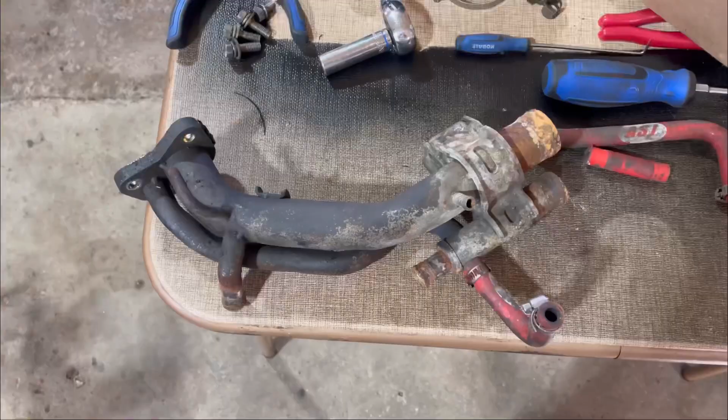Hey y'all, welcome to part 3 of the engine rebuild. In this video we're going to be focusing a lot on painting parts that are removed from around the engine, as well as cleaning a lot of the parts. Before we get into the video though, I want to show you something that I forgot to show you in the last video.

So this is your water pipe. This comes off of your thermostat housing here, and then this feeds into your block, and that feeds into your temperature sensor, and so on. This is why my coolant was so brown.

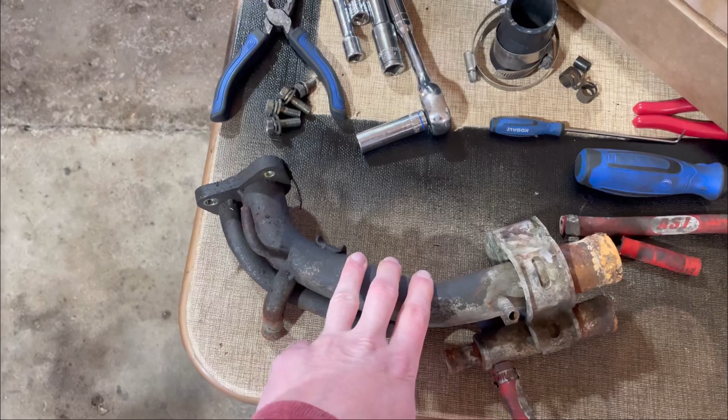It was just sending all of this rust throughout the entire system. So I went ahead and picked up a water pipe from an Avenir, which has the DET. I think it was the W11, could have been the W10, I can't remember, but it was brand new, so hopefully that solves my issue. It's a slightly different design. Some of these are in different places. Some of them, this is longer, it goes all the way down to here. This one's longer, it reaches out to here. But hopefully the replacement works just fine and I can make it work on my car.

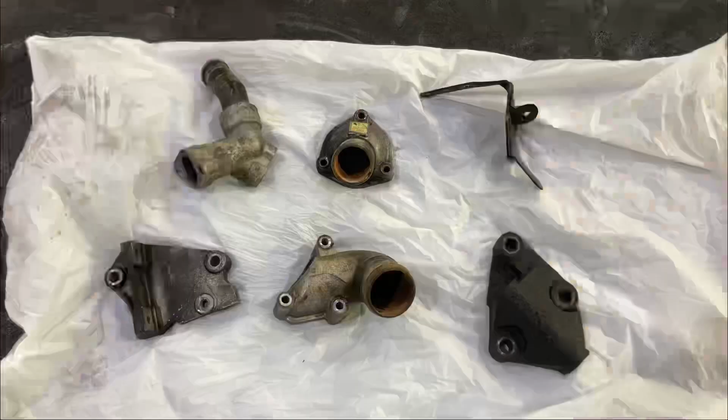So here I am at work. I have a whole bunch of different mounts and housings here that I'm going to be glass bead blasting, and then we'll paint them so it gives the block a nice refinished look. But before we go straight to glass bead, we need to put these through the parts cleaner to get off all the oil and grease.

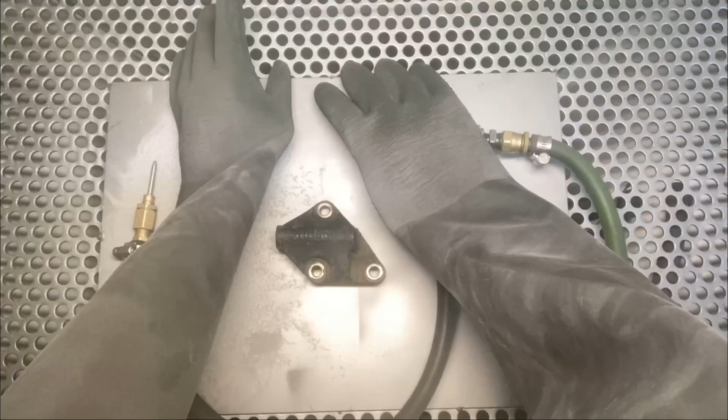Here I am in the process of alodining all these parts, so you can see the difference between the parts that were freshly glass bead blasted and the parts that were freshly alodined.

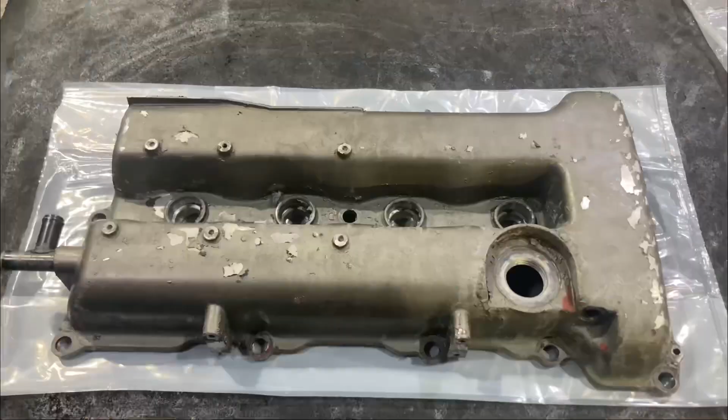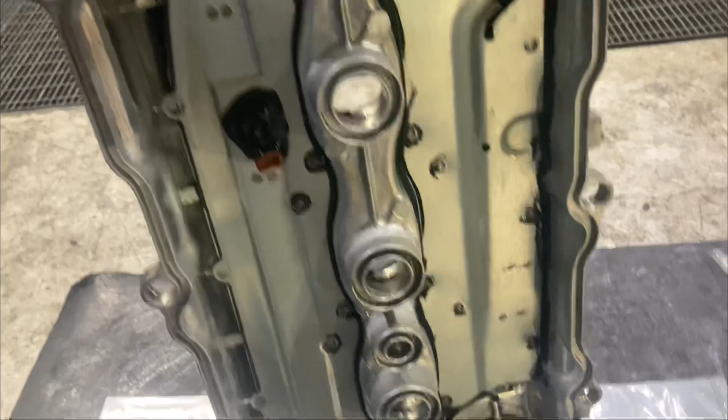I am prepping the valve cover to get painted. Disregard how crappy it looks right now. I just put it through our parts cleaner and it kind of stripped off the paint, but that's fine because we're painting it. And it looks pretty clean on the inside as well. So let's go ahead and blast the rest of this paint off.

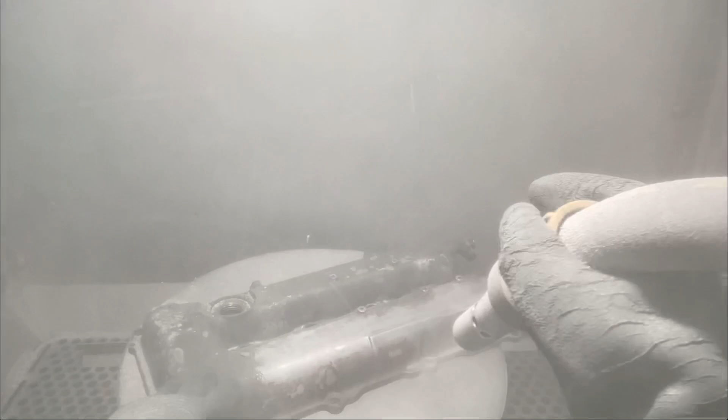Now that we have our valve cover blasted, what I'm going to do is alodine it.

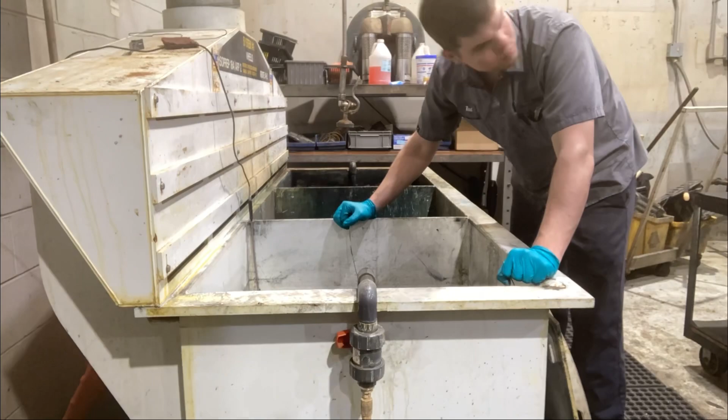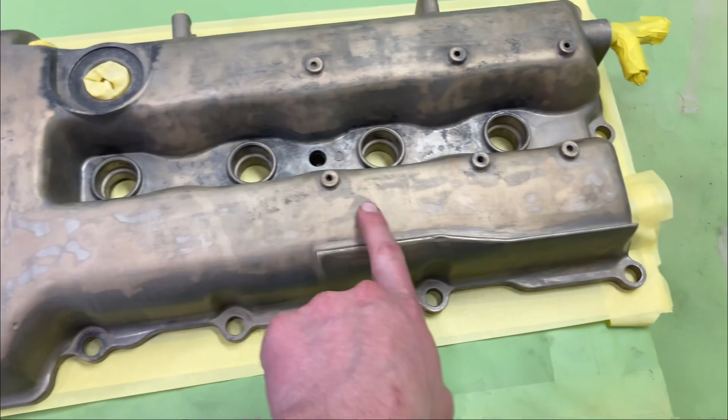Here is the finished valve cover, which is alodined and prepped for paint. Valve cover is all prepped. One thing is you want to wipe off the surface with some isopropyl alcohol, and I completely taped off the entire bottom side. Another thing is to fill the threaded holes.

When painting, make sure you wear the proper protective equipment, so a respirator or a supplied air hood, as well as gloves. Gloves aren't really necessary, but I prefer them just so paint doesn't get all over my hand. So let's get into it.

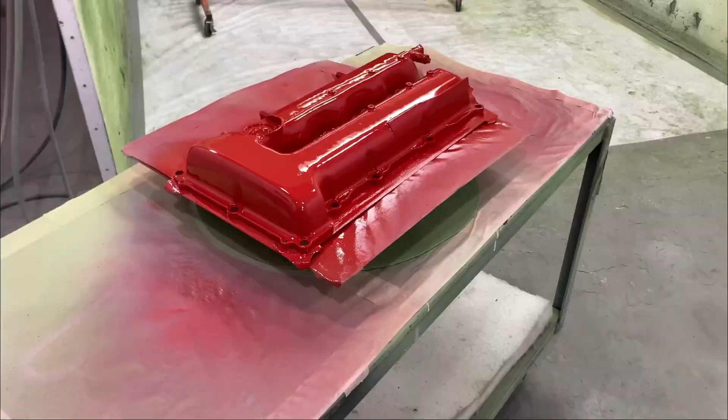Alright, so here we have all of our finished parts. You got several ones over there that are still curing, and all the black ones over here. Overall, I'm pretty damn happy with how this turned out. Look at that finish.

Alright, so we got a lot accomplished today. I've been here at work on a Saturday spraying for the last like 8 hours. Gonna be coming back in tomorrow to take all of the parts and let them cure overnight. That way I can put them back in the milk crate that I brought them in so I can take them back home.

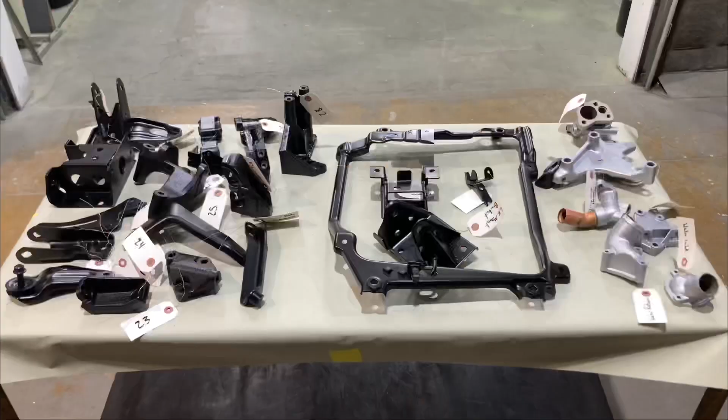And probably do the intake next because it'll look weird having all of those parts done, but having the intake not done. So that's my plan, is to grab and disassemble the intake, do the runners, the throttle bodies, the collector, and paint that silver. All of the parts here are done, so let's go ahead and pack these up, take them home, and then get the intake ready for painting.

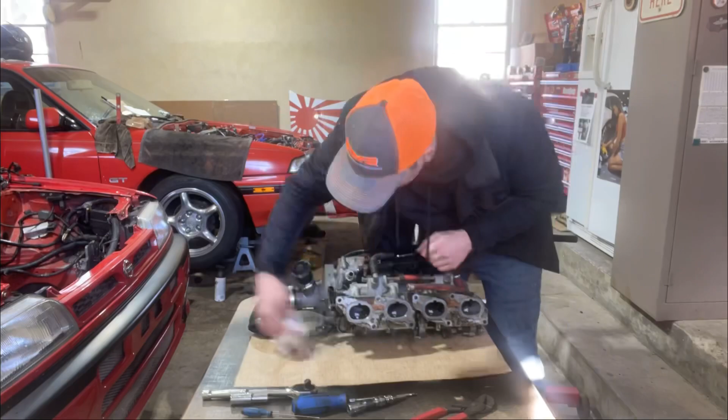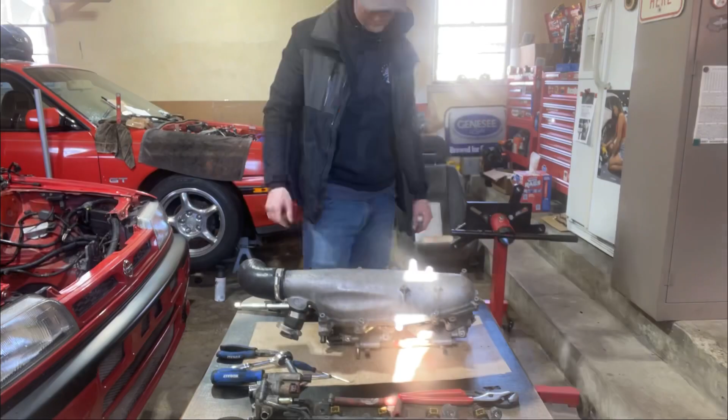Intake is all prepped, so we're gonna go ahead and paint it.

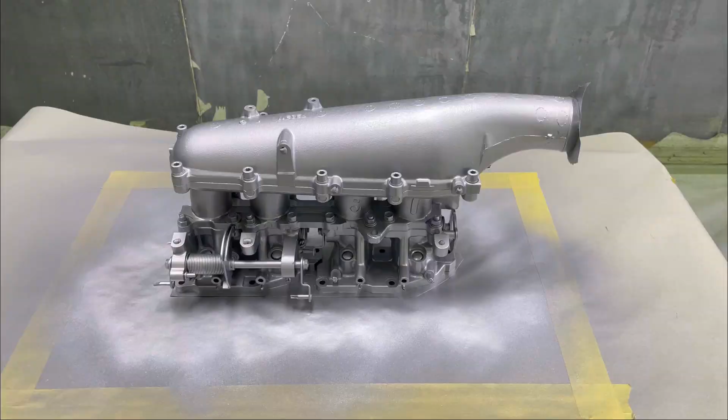The intake is finished, so I'm going to go ahead and put this underneath the heat lamp. That way it can cure and I can take it home tonight.

So while I'm waiting for this to cure, I'll go ahead and give you guys some tips for paint prep. There's a lot of information out there already, so I'm not going to go too much in depth.

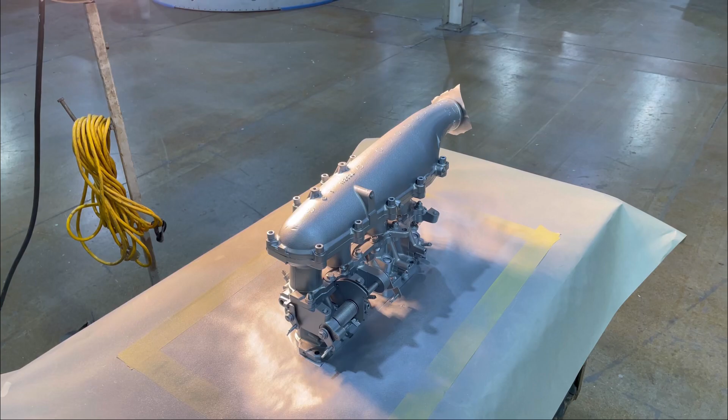Tip 1, make sure you wipe down your part. I know I said it before, but use some isopropyl alcohol and a lint-free towel and wipe it down. That way when you go to spray it, it looks all nice and clean.

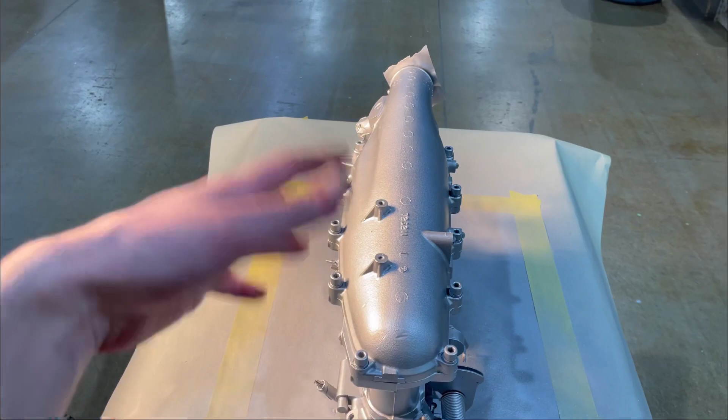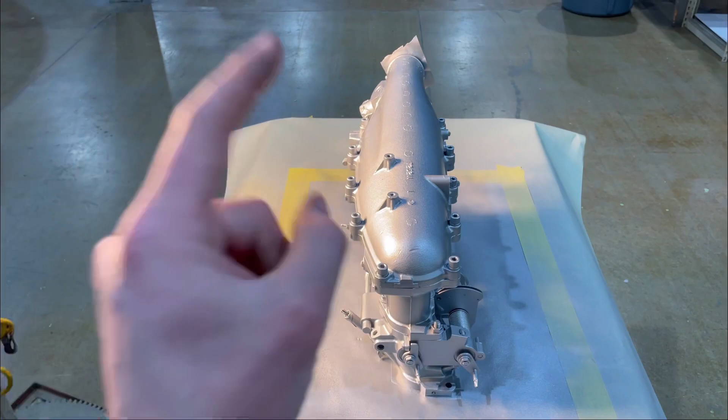Also, after you're done wiping down your part, I would recommend hitting it with some compressed air as well. Even though you use a lint-free towel, there can still be a little bit of residue, so I would use some compressed air to help clean off the rest of anything that's on the part.

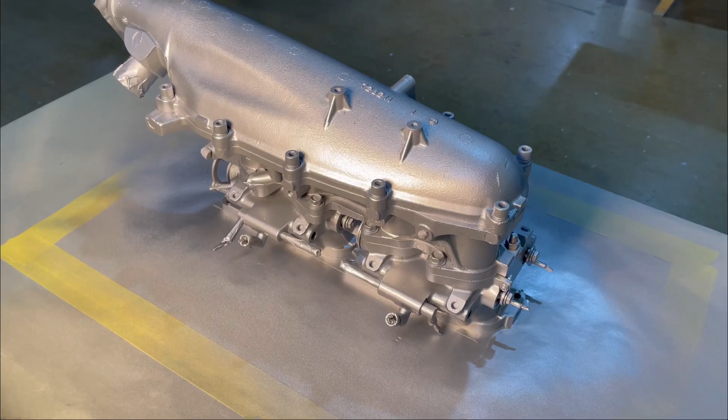Tip number 2, mask off parts where you have coolant flow, or you have vacuum lines, or you have threaded areas.

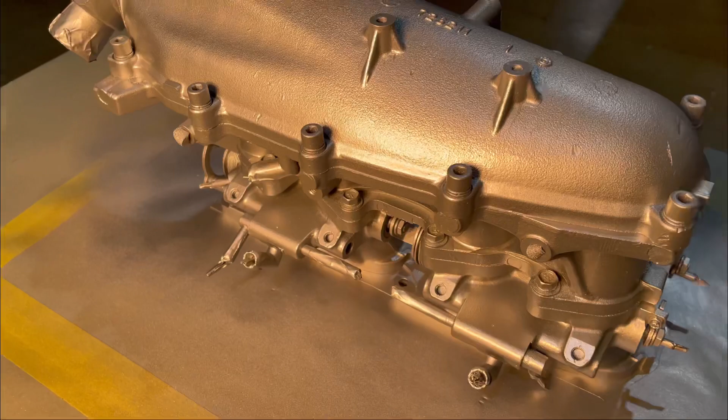That way paint doesn't get on it. You don't get paint in either your cooling system or in the threaded holes. That way it would make it harder to get bolts in.

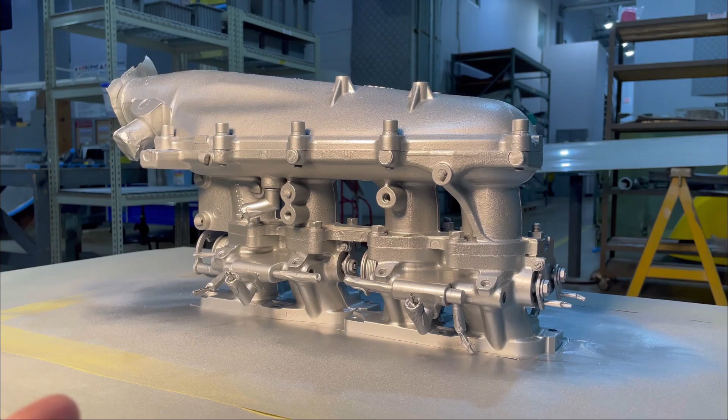Number 3 seems pretty obvious, but it's very, very important. Make sure you spray at different angles. So you don't just sit here like this and continue spraying. You have a lot of crevices that need filled, so make sure you move around your part as you're spraying.

All right, intake's finished. One thing that I didn't do that I kind of wanted to was take off the collector and the runners and separate everything from the throttle bodies, but I didn't want to replace these gaskets just yet.

I was going to, once we put it together, run a smoke machine through it to leak test it. And if it was leaking, then I would replace it. But as long as it holds a seal, I'm not going to replace the gaskets.

Also, because the gaskets are discontinued and they're very expensive. I mean, for both of the throttle body gaskets from the UK, after shipping it's like $60 for the set.

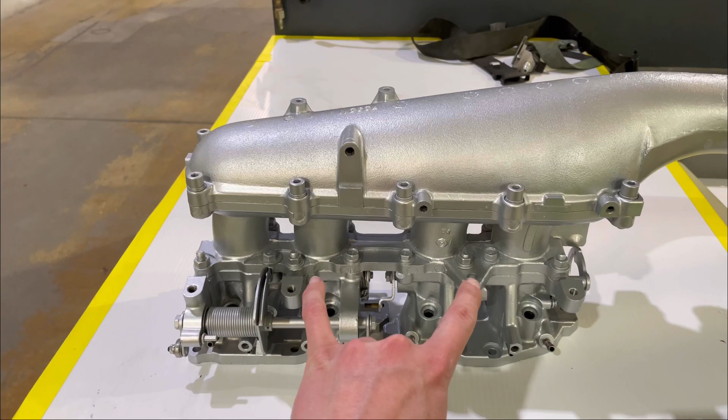And then the collector gasket all the way around here, I'm only able to find it one place on eBay, literally the only place I can find it, and it's like $90 for the gasket. So I'd rather not spend that much just for some seals if I don't have to.

After seeing this in silver, kind of upset that I didn't paint the fuel rail black. But yeah, I painted it silver. Might do that when I go to bigger injectors with a bigger turbo. Might paint that one black. We'll see how it looks with both silver ones in the car.

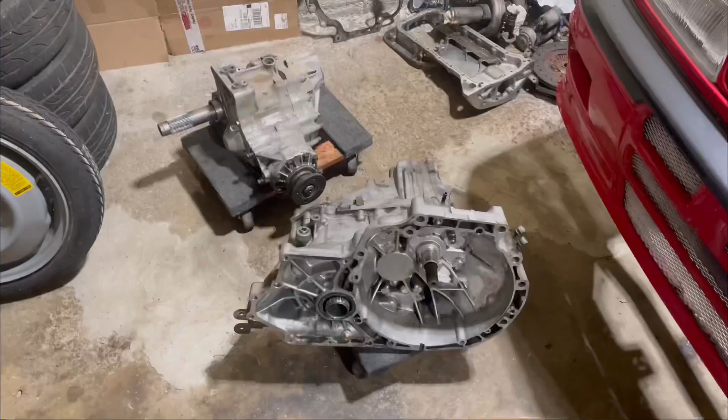While I'm waiting for parts to come in and my block and head to come back from the machine shop, I decided to start cleaning everything. So the transfer and transmission are cleaned. They're not perfect, you can still obviously see some oxidation, but it's a lot cleaner than it was.

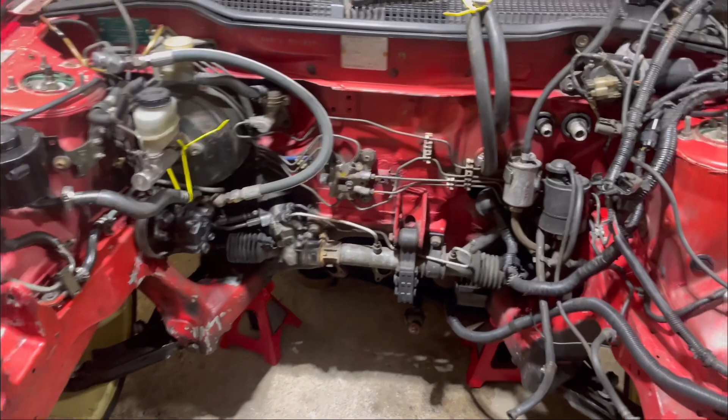And I also cleaned the engine bay. It's once again not perfect, but looks a lot better.

The cam brackets turned out really, really good as well. So everything on the head should have a nice refresh and be nice and clean.

One thing I did notice as well on the cams when I was cleaning them, it says 53J on it. So I looked at the part number from the parts catalog, and the cams are supposed to be 54C specific.

I'm not sure if that's just a machining thing where this is a 54C cam, or if they actually are interchangeable, and for some reason the Pulsars have a unique part number, but I just found that interesting.